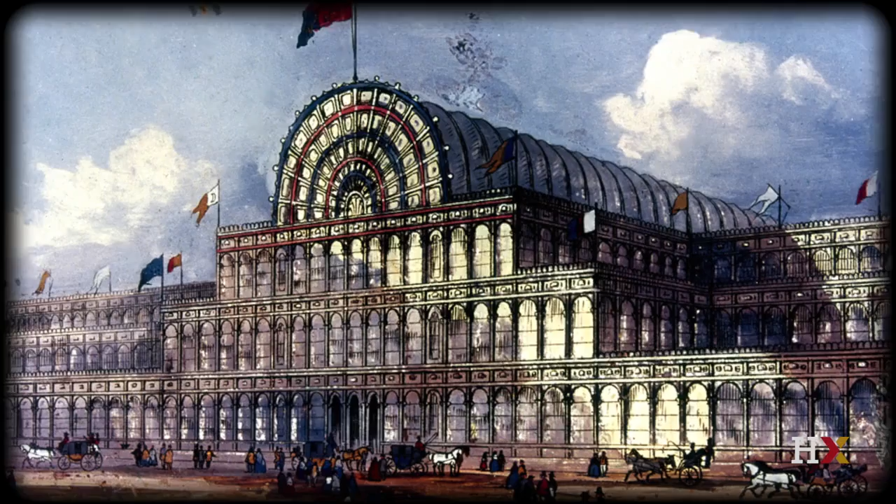The overall organization of the building is quite simple. It is actually strangely reminiscent of the structure of a church, with a central nave which is 72 feet large and rises at a height of 64 feet, but which is actually 4 times longer than the greatest church in the United Kingdom, St. Paul, and of course with a much thinner structure. These made a very spectacular impression on all the visitors.

This is the Crystal Palace immediately after the end of the Great Exhibition, and we can see this kind of impression of infinity. It was perhaps the first time that a building gave this impression of being infinite, this repetitive, almost infinite space in which the eye got almost lost.

I mentioned the trees. Here we have the transept of the Crystal Palace with one of the trees. And we are, by the same token, introduced to another theme that will play an important role throughout the Great Exhibition, which is the juxtaposition of the natural and the artificial, with a suggestion that human industry is actually an extension of a kind of fecundity of nature itself.

The main entrance of the exhibition was through the transept, and people immediately discovered the trees, but also fountains, colors. I'll come back to the ambience of the Great Exhibition because this is also an important aspect that gave the building also its mythical character.

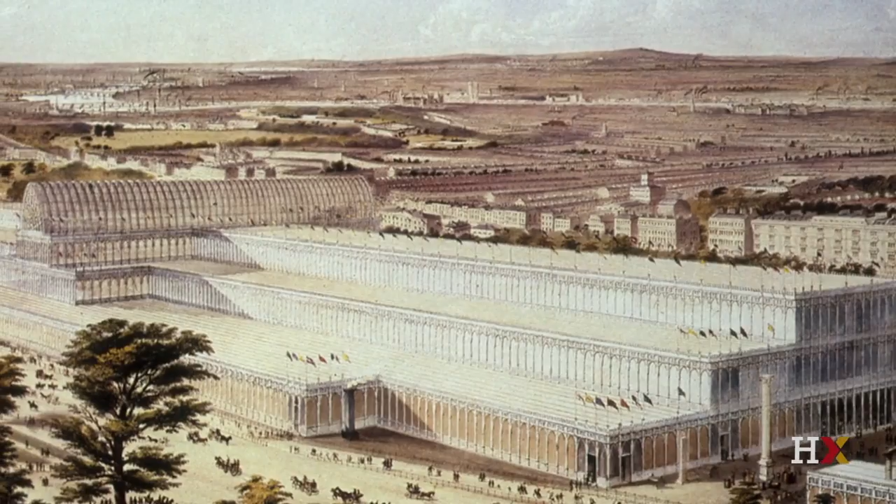Because of its scale, the building confronted its designers with completely unexpected problems. One was actually how to evacuate water, the rain that fell on the roof. Because of the surface the building covered, this problem of how to get rid of the water was actually pretty crucial. The solution adopted, which Paxton had tested but at a much, much smaller scale in his Lily House, was actually to use hollow columns in which the water would actually be evacuated.

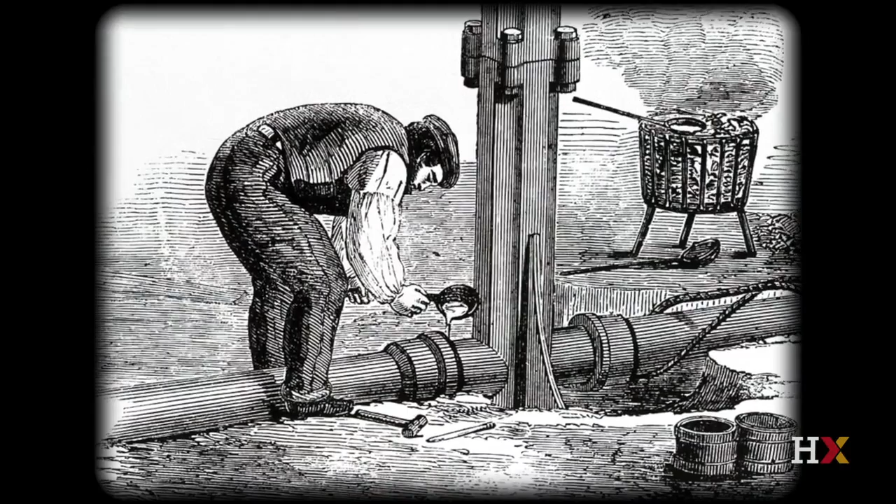The new thing was actually that at the bottom of the column you found pipes that were directly related to the sewers of the city. So we understand another thing, which is that this is actually the beginning of the merging between the buildings and infrastructure. The building is so large that it becomes commensurable with the urban infrastructure as a whole.

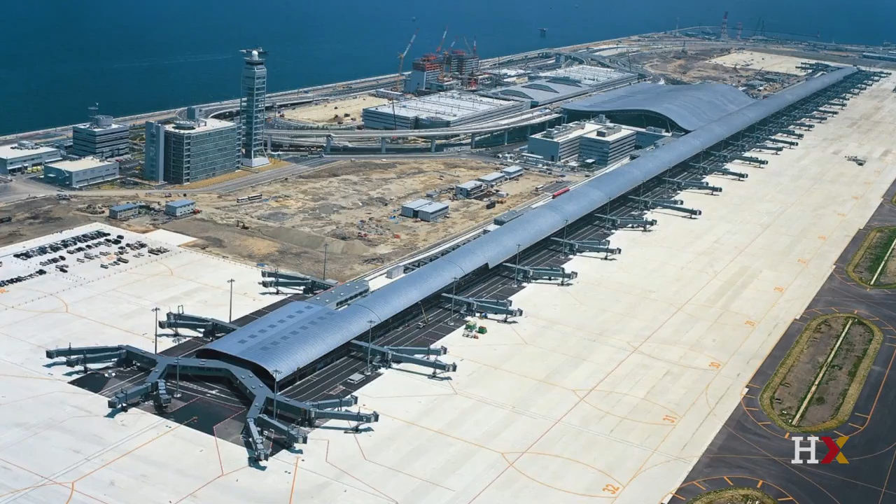Since the construction of the Crystal Palace in 1851, this potential blurring between architecture and infrastructure has been with us repeatedly. This has been the case, for example, with the Kansai Airport, built by Renzo Piano in Japan, which was, at the time of its completion, one of the largest buildings in the world, a few kilometers long.

It's quite revealing that actually Ove Arup, when presenting, in order to give an idea of the scale of the building, actually used Hyde Park, the very site where the Crystal Palace was constructed, as if large buildings like the Kansai Airport Terminal were actually the inheritor, and they are indeed, of this kind of gigantism that was introduced at the time of the Crystal Palace.

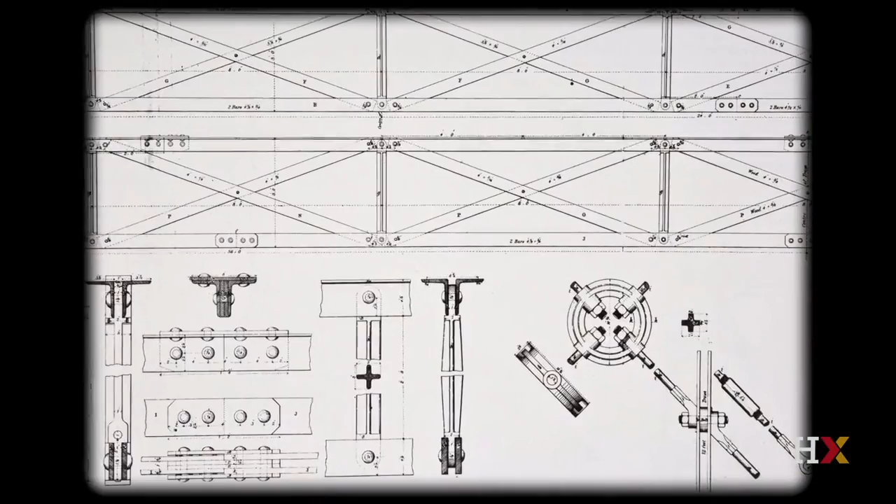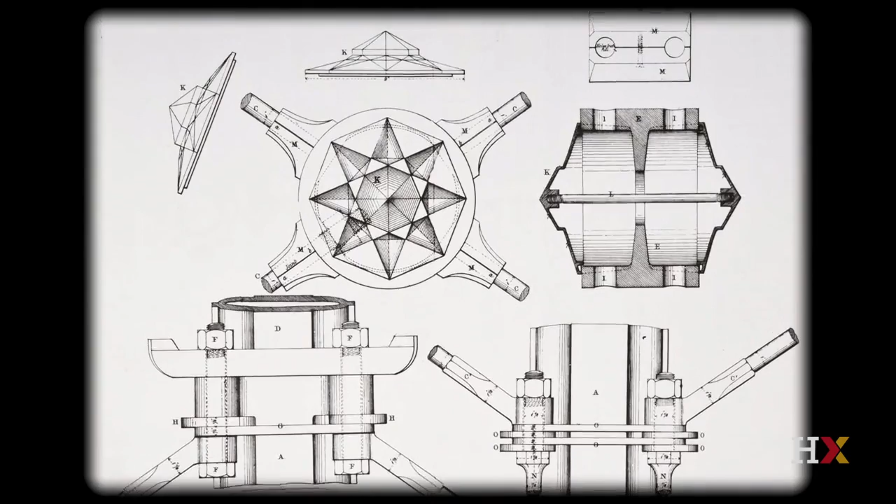Another interesting aspect to note is actually the kind of double level of reading of a structure like this one. Let's pay attention, for example, to the node. In order to additionally stabilize the structure, you have these giant ties that intersect, and there you have a node in the middle. Look at the complexity of the node. Of course, you don't discover it immediately, but actually iron construction will be marked by this kind of tension between the overall appearance and the details, and the secret complementarity between the two.

This is something to keep in mind, that in iron, because of the very repetitive nature, details do matter. God is in the detail, as some famous architect would later say. And Paxton is somebody who works, once again, both on the overall scheme, but also in these very minute details.

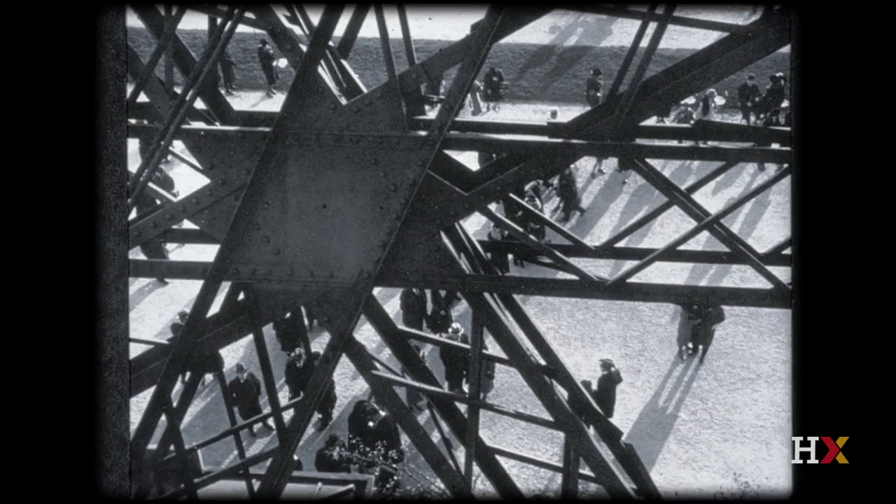In order to understand that, and other buildings built much later, actually the Eiffel Tower of 1889, the overall impression is actually very much dependent on the type of node used. Here you have the typical node of the Eiffel Tower, and there again there is this complementarity between the overall impression and details that are almost subliminal, but do play actually quite an important role in the reading of the structure.

The famous art critic and theorist John Ruskin had very mixed feelings about the Crystal Palace, because of course he was impressed by the performance, as if, as he said, the whole world had been encompassed by a single building. But at the same time, and we'll return to that, he was critical because iron was not his favorite material and he despised industrialization.

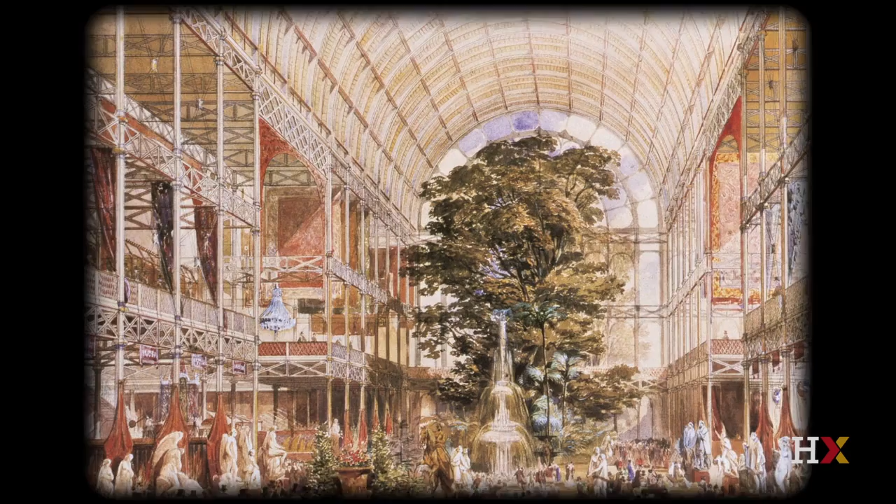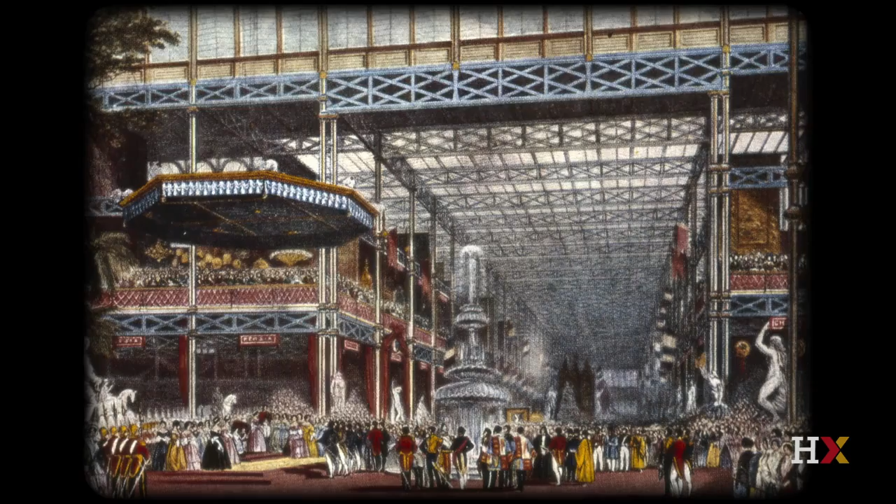Nevertheless, saying that the whole world could now be sheltered in a single building introduces another very important dimension of this building, which is a kind of environmental quality. This is a building in which ventilation, the control of humidity, all these questions that we think have arisen only recently were already present. You have to imagine millions of people sweating, etc.

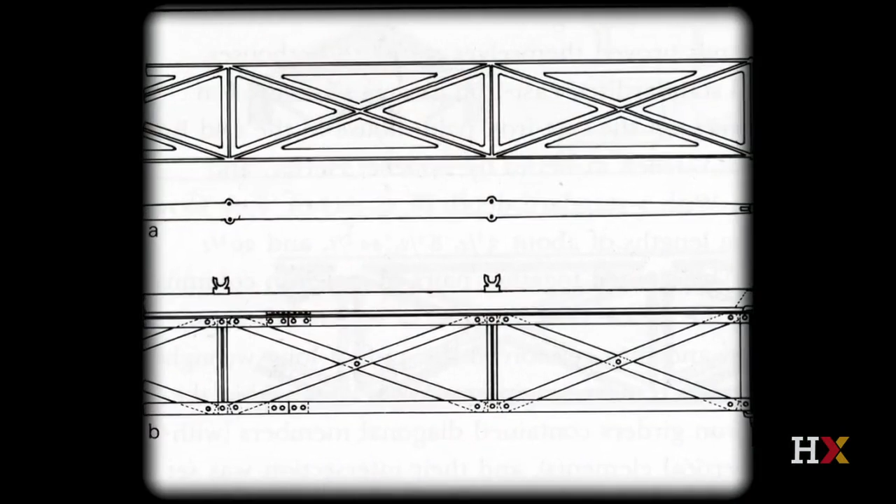You have to imagine the heat, even in London, sometimes you can get sun and the building can get pretty hot. So the typical problem of a greenhouse, but of course it was a greenhouse not for tropical plants, but for people. This is actually one of the louvers of Paxton. And actually the building is inseparable from complex problems of ventilation that there again we take for granted, but were for the first time really addressed at such a scale.

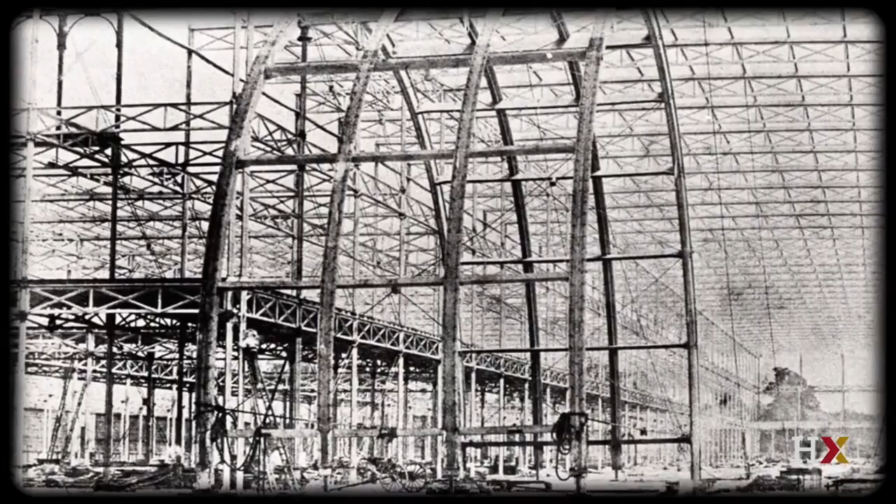The Crystal Palace was mythical not only because of the very unique ambience it offered to its visitor, but also because of the construction. The construction is an integral part of the myth. One could even say that it was the first time that construction was really as much associated with the meaning of the building. The contemporaries were completely struck by how these standardized pieces arrived on site, were assembled.

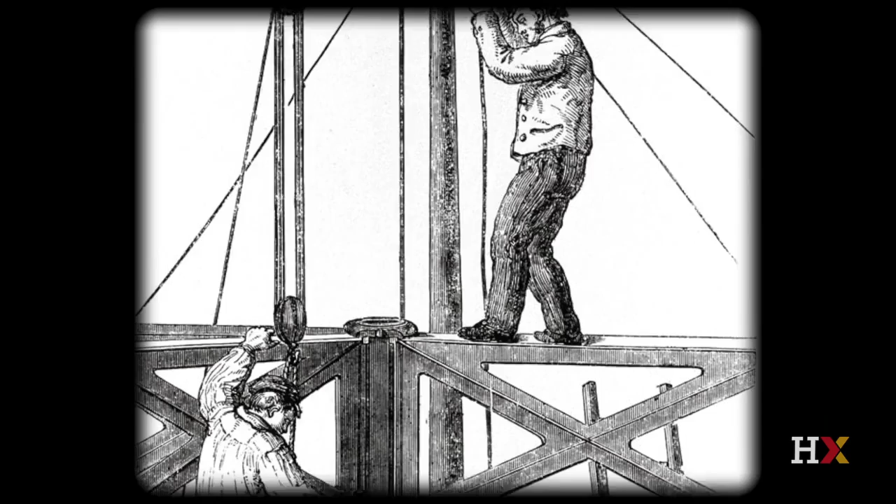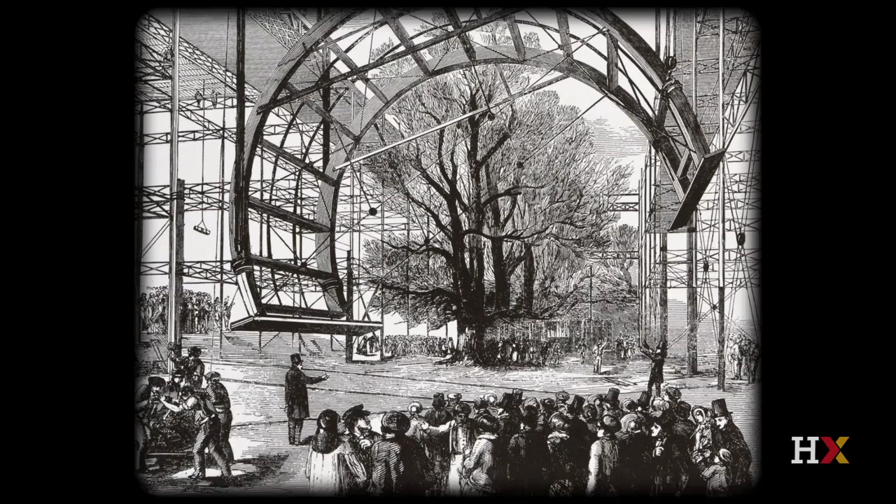This is the beginning also of the fascination for dry assemblage. So nothing having to do with the wetness of mortar, nothing like all these traditional construction techniques, but something like a magic dance of parts, pieces. Not yet machines. Horses were still the main source of power on the construction. In some ways, the Marxian notion of forces of production was almost illustrated by such a ballet of industrial components.

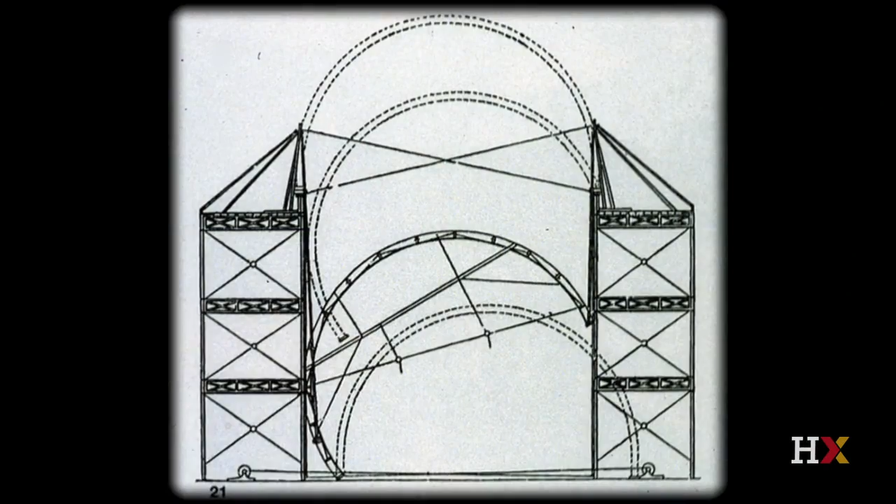Throughout the construction, Paxton was, of course, present and had multiple opportunities to show his ingeniosity. For example, putting in place the barrel vault elements of the transept was not such a simple process. As we can see on this engraving, the barrel vault elements were actually in wood. There again, we find this complexity and this mix of traditional and more modern elements. The construction site was, by the way, really a spectacle, and Fox and Henderson actually sold tickets in order for the public to come and visit and see what was going on.

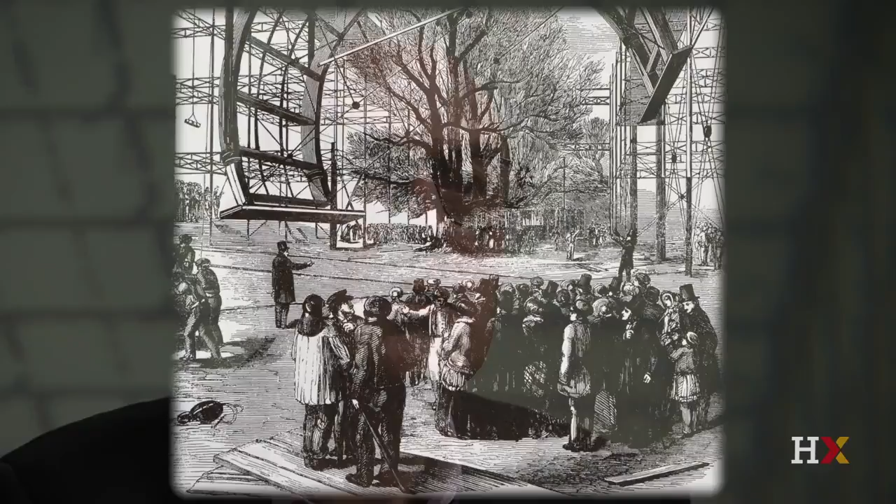Speaking of ingeniosity, Paxton also designed a number of machines for edging, glazing, for all kinds of purposes on the construction site. Here we find also another interesting aspect of what the Crystal Palace was about, which is a kind of continuity between structural and mechanical engineering, something very specific to the British scene in many respects. On the continent, engineers or builders did not always imagine machines. Here, to design machines and to design a building are part of the same continuum.

And this is also a very important aspect, an aspect that might explain in some ways why the high-tech expression was a product of Great Britain in the 20th century, as if this legacy of articulation between machines and buildings had remained an enduring tradition.

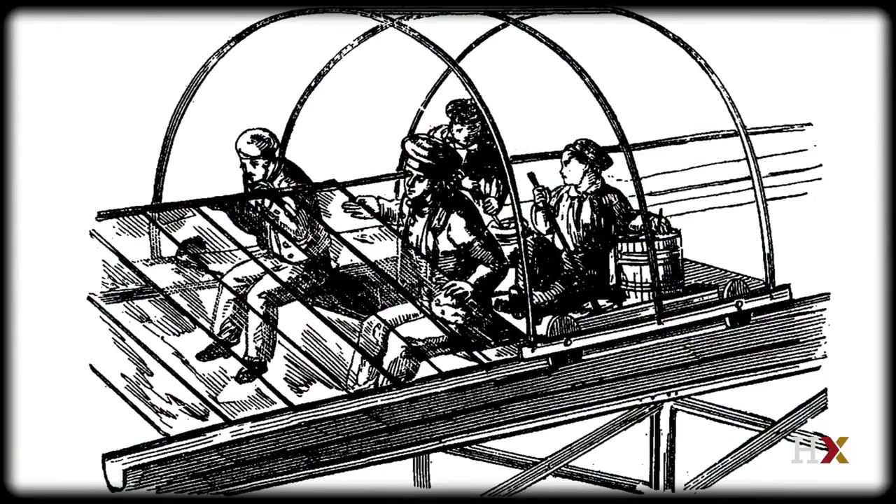Putting in place the glass for the roof was also quite something, an enormous enterprise, in which, of course, risk was present. The glass could break, could fall on the workers working below, so special precaution had to be taken. There again, innovative techniques were put into place. For example, you have these little carriages on rails that enabled actually to go a bit faster when putting in place the large sheets of glass produced by the Chance Brothers factory.

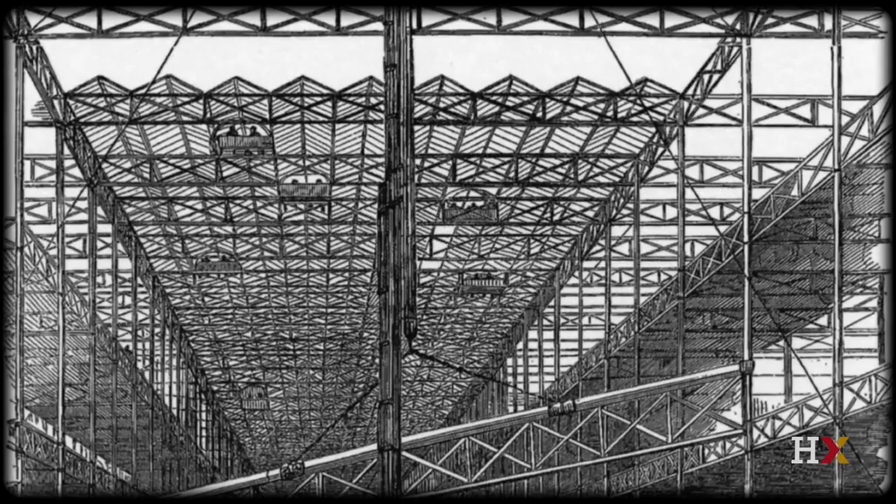Here on this vision, if you pay closer attention, you will see actually the little carriages circulating on top of the building on the rails and putting in place the glass, while on the front of the picture you have horses which are used to lift a girder of the nave. So we can see there again this mix of innovation and tradition. Mechanization would take over far later on construction sites.

The result was a completely strange space for the contemporaries. Something fascinating, but something that was not easy to categorize. Was it architecture? Was it something else? I have mentioned the blurring between architecture and infrastructure. In some ways, the Crystal Palace was sublime. That's to say, something that escaped usual aesthetic categories.

And Paxton himself was never fully recognized as a fully fledged designer. It's quite revealing that despite this spectacular achievement, he was never awarded the medal of the Royal Institute of British Architects, as if the nature of what he had produced remained uncertain. This strangely repetitive, fascinating space, but was it really an architectural creation?

And there, of course, we understand why John Ruskin was so reluctant. Was it still art in the traditional sense? Where was the hand of the craftsman that Ruskin praised above everything? All these traditional dimensions of art and architecture had vanished in this enchantment of iron and glass that would fascinate millions of people, but the status of which remained very unclear in the eye of the professional.

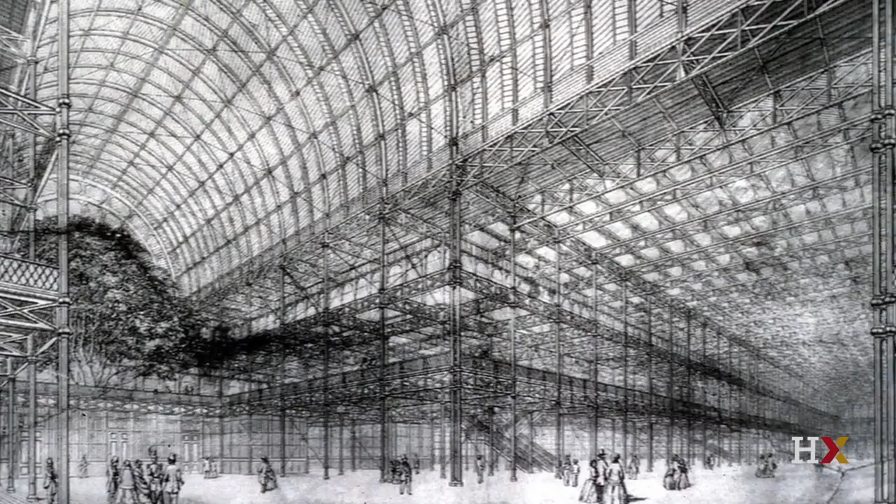On this view, we can almost feel this sublimity linked to the idea of infinity, of transparency, and we can also understand why people who appreciated Greek temples or Gothic churches could feel a bit ill at ease in front of such a construction that did not enter any clear category of the history of architecture.